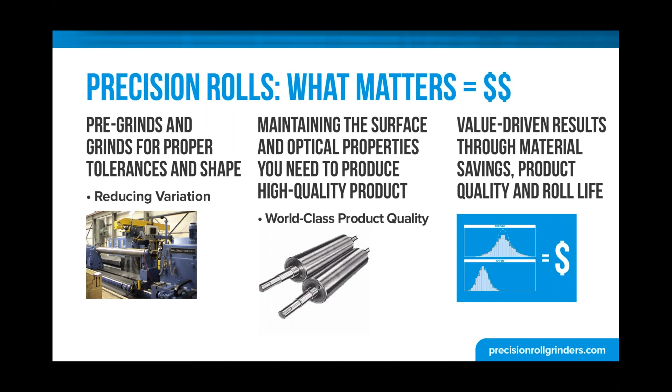So ensure that your roll service provider understands surface and optical properties as much as the geometric tolerances that we were talking about in the first example. It all plays together. And again, at the end of the day, you ought to be talking to your roll service and grinding provider about, okay, what's the real economic benefit? How is this an investment for me as opposed to just a line item maintenance cost? Because it should be an investment. We realize that roll grinding and roll services are not inexpensive, but they do have a return. And that's what we want to talk about here.

So let's talk about the first component of reducing variation. Roll roundness matters. This is an example of a precision ground roll versus a roll that was ground in bearings. We realize that there's a thought process out there that you grind it in bearings because that's the way it runs, and we'd ask you to reconsider that. We'll talk about it with respect to concentricity and shape of that roll too, but you can't produce roundness any better than the bearing play will allow you. And in many, many cases, that is too critical to overlook. And we might even argue in all cases that it's too critical to overlook.

Most of the manufacturing equipment out there is being asked to run faster, more efficiently, and with less downtime than it was ever originally designed to do. It's the nature of North American manufacturing. In many cases, if you've got brand new equipment, then you're one of the fortunate few. So with that, tolerances on that machine should not be getting looser, they should be getting tighter, right?

And there, again, it's got to come down to proof of economic benefit, right? But those tighter tolerances allow for rolls to run longer. They allow for rolls to run more consistently, which means you have more consistent product over time, less quality defects, less downtime. So the scale on these, they are the same. So you can see the difference with being able to grind it off the journal versus grinding it in bearings.

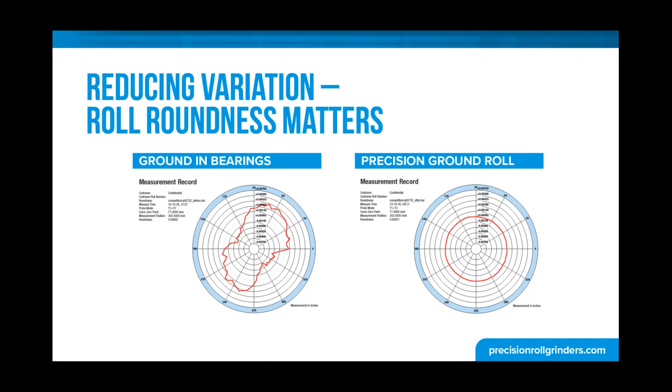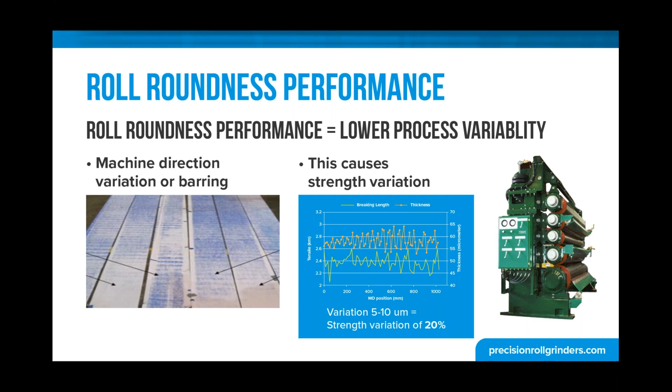So those mystery efficiency losses that you have around working roll sets, the web breaking or quality not being quite right, let's take a look at variability that might be getting induced because of roll roundness. Roll shape. How is that roll shaped properly? Does it have proper crown in it? If it's flat, is it perfectly flat? It depends on how heavily the two rolls are being loaded together.

Depends on what kind of product you're making, but there are absolute inefficiencies in not having a good shape in the roll. It translates directly to the profile of the product that you're making, from drive side to tending side of whatever machine that you might be running. And it's not even in continuous webs alone, it's also in, as an example, flaking operations, where we have a thicker flake on the back than we do in the center than we do in the front. Is there a taper in the roll? Is the roll not shaped right? Is it building a crown into itself over time?

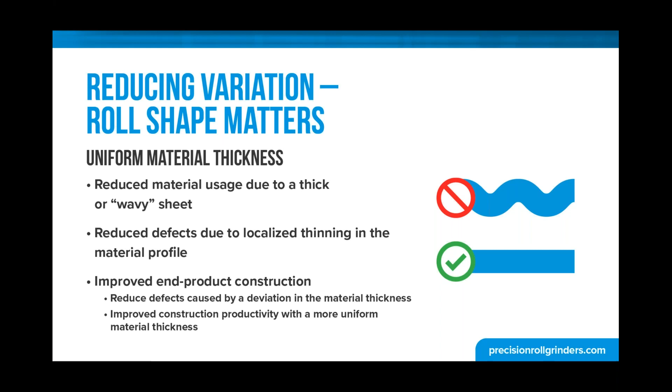Those inefficiencies, again, should be able to correlate directly to economic benefit. So reduced material usage due to a thicker or wavy sheet, localized thinning in a material profile that generally manifests itself in strength issues, and ultimately improved end product construction. Are your converters seeing issues? Are the downstream processes seeing issues? Is extraction of oil less efficient? If you're rolling steel, are your converters seeing inconsistencies? These are the things that we can directly correlate to economic benefit. Again, thinking of roll grinding and roll services as an investment instead of a cost.

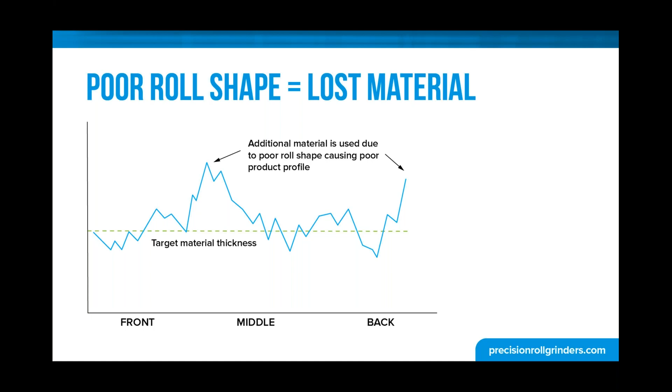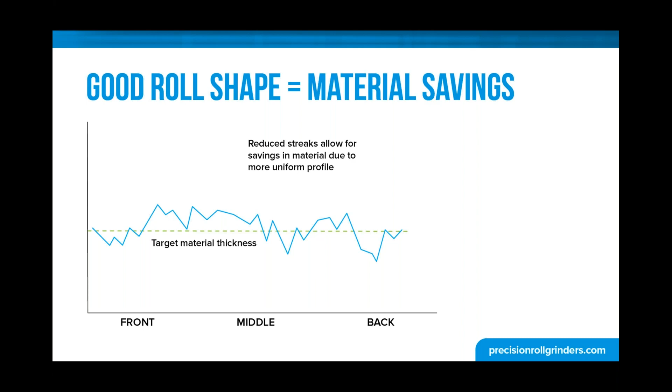And this is a quick real life case study here, obviously sanitized because we're very conscientious about the non-disclosure agreements we have with folks. But in this case, target material thickness is represented by the green line, and they were running an average thickness much heavier due to the fact that the profile was inconsistent. Proper roll grinding allowed that profile to become much more consistent, and you can see now it's more of an average, tighter control, around that target material thickness, and that translated to hundreds of thousands of dollars in saved material per year. So roll shape really matters too. And it could be any material, again, rubber through a calender, coating in a coating operation, that kind of thing.

And then the third geometric component that we really need to pay attention to is concentricity. So how the face of the roll should be perfectly concentric to the center line of the journal. If not, you're putting a cam into your manufacturing process. Even if it's a slight cam, it's still an inconsistency. It still goes back to that machine direction variability we saw represented in the carbon nip paper, which is building variability and inconsistency into the product.

This is often overlooked. It is certainly overlooked if you're working with a roll grinding provider that is grinding in your existing bearings. And we understand there's cost involved there, but again, at the end of the day, let the economics tell a story. Let's partner and look at a study and conduct that study and see at the end of the day what happens.

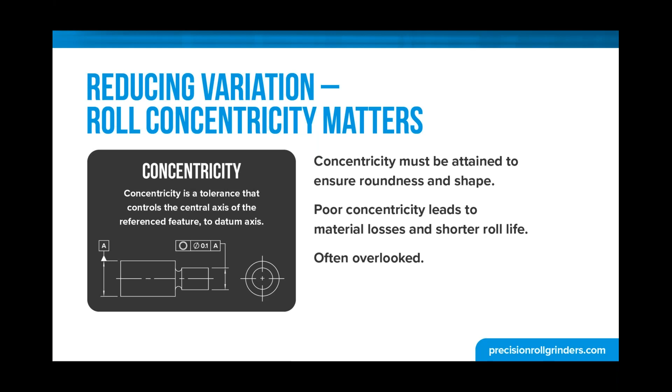You know, 10% of our work has tolerances less than 2.5 microns. Our typical tolerance is 5. So our typical tolerance is, I think that's 2/10,000ths of an inch. So you may not think that tolerance is necessary in your process, and your specifications may be a thousandth or half a thousandth. But again, is that roundness there?

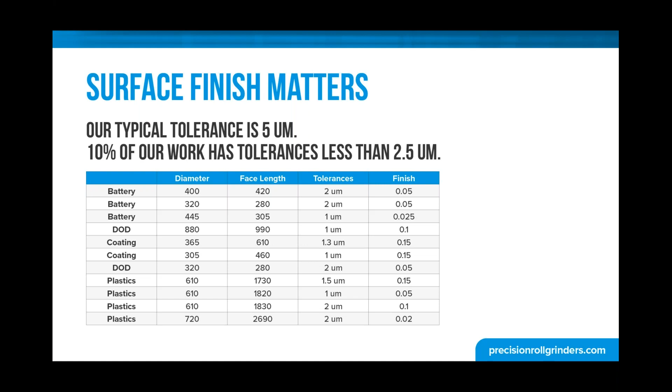Is the shape there? Is the concentricity there? So that when you put it in your machine, it's going to run not only more consistently, but longer. And we'll get to that here in a little bit, because it does directly correlate to roll run life.

And we're working on the ability to allow customers to kind of plug and play with this, right? We can customize a spreadsheet and give it to you now so you can kind of plug and play. We realize you can't share a lot of that information with us on cost structure, but it allows us to make sure at the end of the day that we're bringing true economic value.

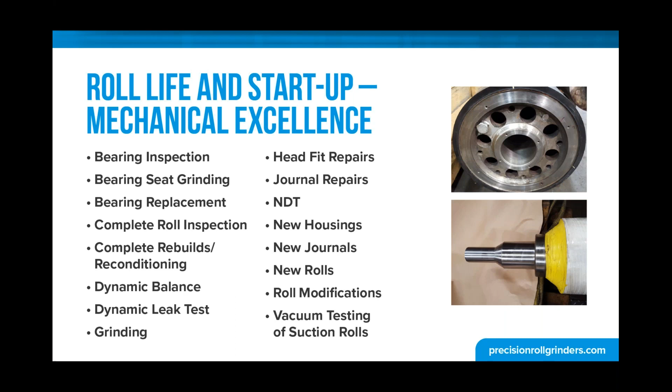Another piece of roll life and roll performance is mechanical excellence. Bearing inspections and seat grinding and replacement, complete inspections of internals as well as the face of the roll, journals, housings, it's all got to work together. There's a reason that your machines were designed with precision rolls in them in the first place. So just ensure that you're working with a roll service provider that's capable of doing all that.

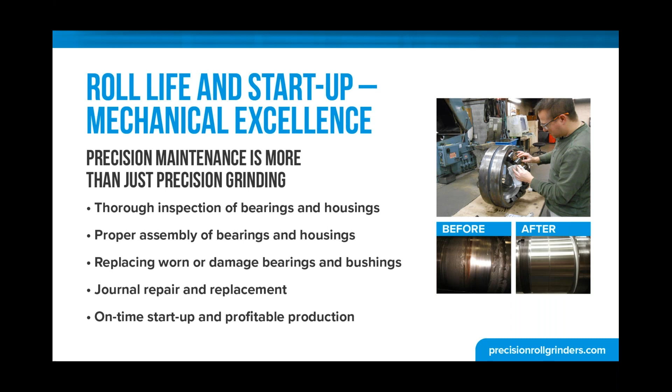Quite often we see that excellence in mechanical aspects of rolls and excellence in machining aspects of rolls along with the grinding really affects startup time. When you put those rolls back into your machine, you're not having to search for that sweet spot, it comes to it much quicker. And again, that pays big dividends economically. So making sure that the bearings are right, that the bearing seats are right, that worn components are replaced is really critical to on-time startup and profitable production.

The internals of a roll, in many cases, thermal transfer is critical, right? Whether you're cooling or heating, making sure that the internals are right to prevent sheet scorching or hot spots. To prevent thermal runout, we know that metal expands and contracts thermally. So how can we best partner with you to do that?

Is it required to do a three-dimensional grind on it so that it can be at operating temperature, so that it can be ground at ambient temperature going forward? We're capable of doing that kind of thing with you too. And at the end of the day, generally it really helps increase production speeds because you're taking that variable of differential heat out of the equation.

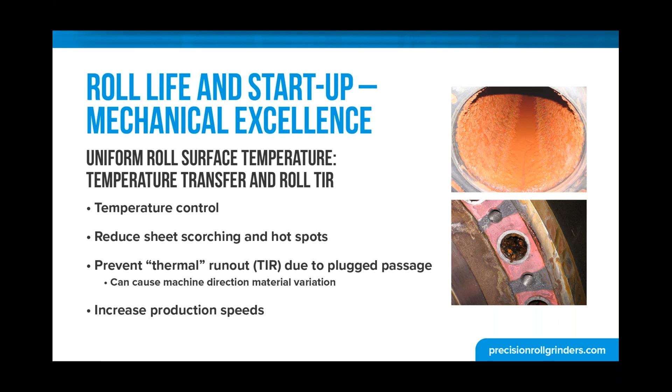So why is all this important? We've talked about the production parameters around why it's important: reducing material usage, reducing scrap product because of being outside of specifications, preventing disruptions in the production, whether it be the web breaks or inconsistent flaking, that kind of thing. At the end of the day, it also really drives roll life.